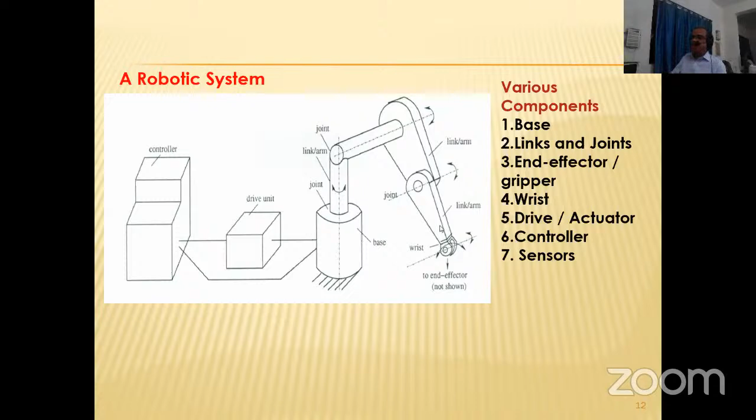Now, a typical robotic system consists of a few links, as I told, and a few joints. At each of the joints, there will be motors. The motor will be connected to the controller, and there must be sensors to collect information of the environment. There could be different types of sensors: a few internal sensors, a few external sensors. We take the help of a camera. With the help of the camera, we collect information of the environment and we do processing.

Now I'm going to discuss the areas where the principle of AI could be used in robotics. And remember, all the AI tools may not be applicable in robotics. As I mentioned, there are 4 modules of robotics. Out of these 4, the first two modules, that is kinematics and dynamics, there is no scope for using the principle of AI. So AI is to be used on the control scheme, on the communication scheme. It has to be used to incorporate intelligence into the head of a robot.

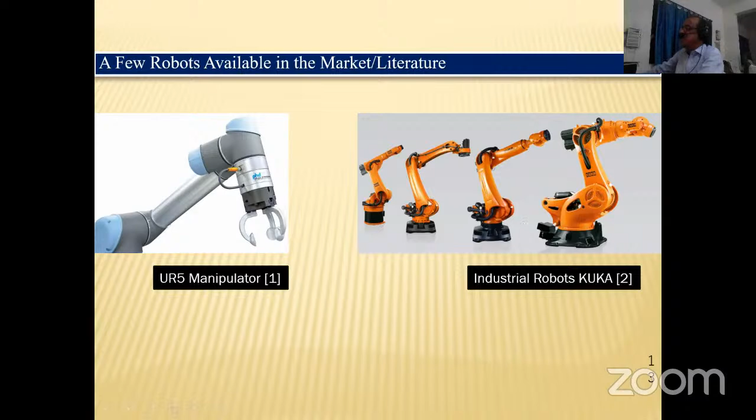Now here I'm going to show you a few robots available in the market. This is how to model the hand of a human being in a mechanical way. This is a serial manipulator called the UR5 manipulator. This is another industrial robot, the KUKA robot. This is also a serial manipulator. This is a wheeled robot, a two-wheeled, one-caster mobile robot, manufactured by Micro Robot in Singapore.

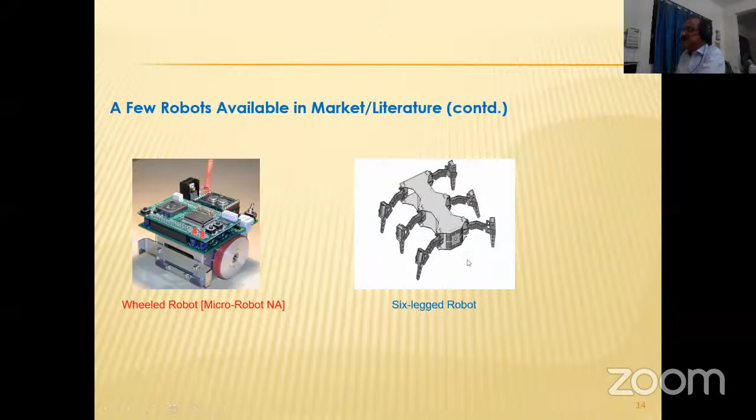This is the schematic view of a 6-legged robot, look-wise similar to a spider. Here I can show you some wheeled robots. We have also developed a wheeled robot for railway track inspection, and we have filed patents also. This is the line following robot. This is a tracked vehicle. We have modified a similar type of robot further, and designed and developed the tracked vehicle as an agricultural robot, for which we also filed a patent in 2023, this year only.

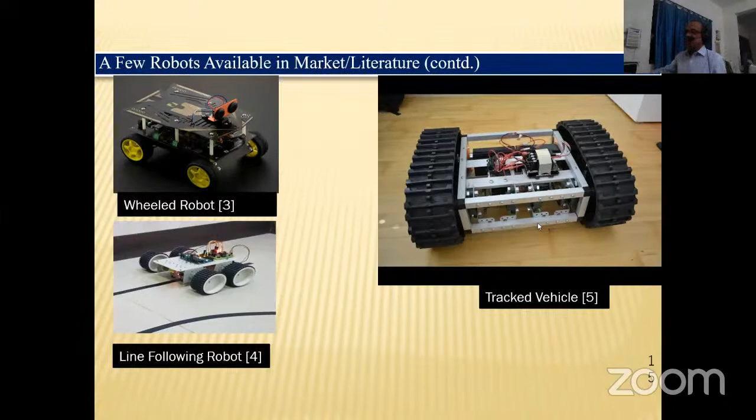Now this shows the 8-legged robot just like an insect, the 6-legged robot like an insect, the 4-legged robot like an animal, and we have also got the 1-legged hopping machine also. And this is only dynamically balanced. We have also got the humanoid robot; now we have got in our Center for Robotics, IIT Kharagpur, a robot having 25 degrees of freedom.

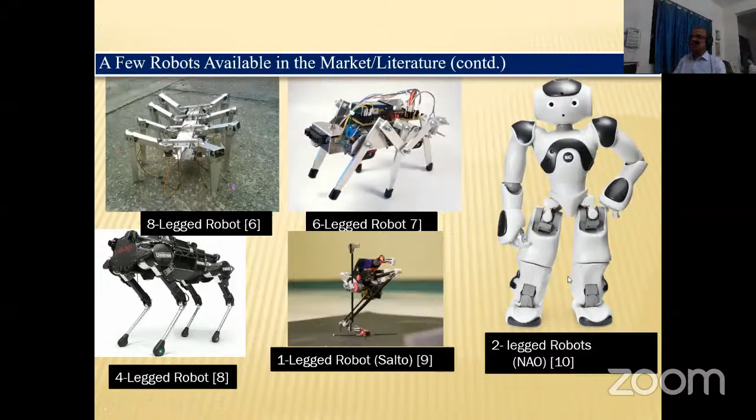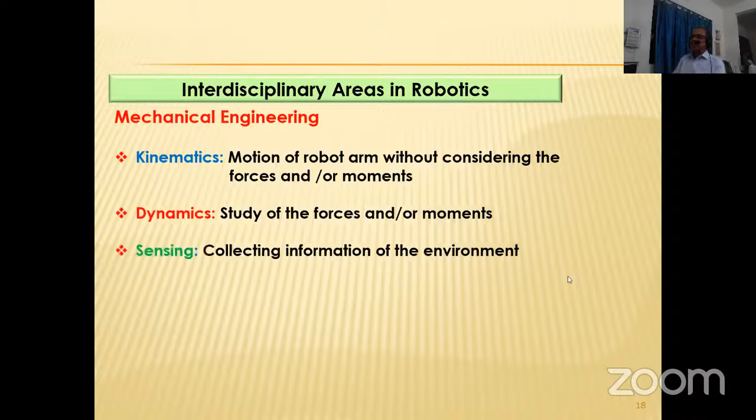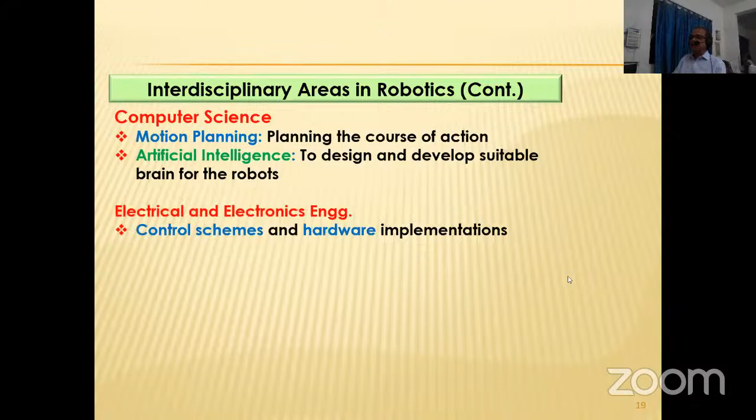So these are actually the different types of robots available in the market, and these are the references for different types of robots which I discussed. Now a few things which I'm going to discuss here: the fields where we could use the principle of AI. These are the things which I've already mentioned: kinematics, dynamics, sensing, then control, then the areas of motion planning, artificial intelligence, which are coming under the purview of computer science, electrical and electronics like control scheme, hardware implementation for the robots. Now I'm just going to concentrate more on the role of AI in robotics.

Now, as I told, in the modules of kinematics and dynamics, we cannot use the principle of AI. AI is to be used to collect information of the environment using the camera and image analysis. So in digital image analysis, there is enough scope of using AI, and nowadays people very frequently carry out this image analysis using deep learning networks, neural networks. We can also use the concept of AI to carry out multi-sensor data fusion to collect information of the environment.

Today, the second speaker, Mr. Bitan Pratihar, is going to talk after some time on how to use the principle of AI, the fuzzy logic, fuzzy clustering, fuzzy reasoning, to extract the important information regarding that particular environment. So this multi-sensor data fusion will be discussed by Bitan after a few minutes.

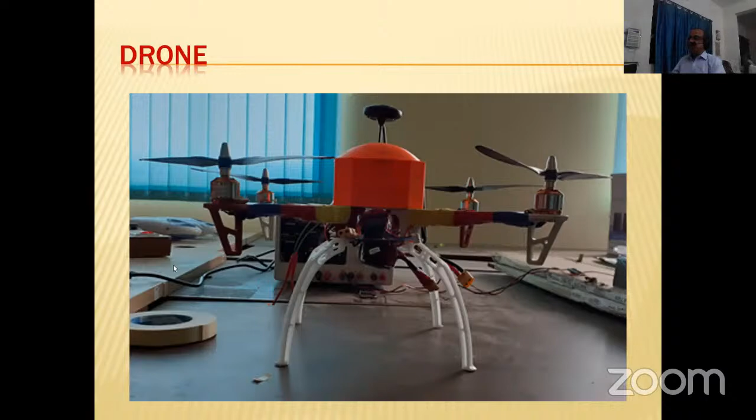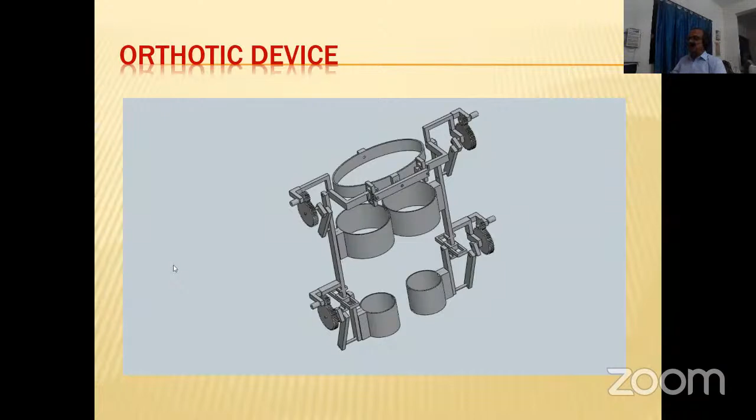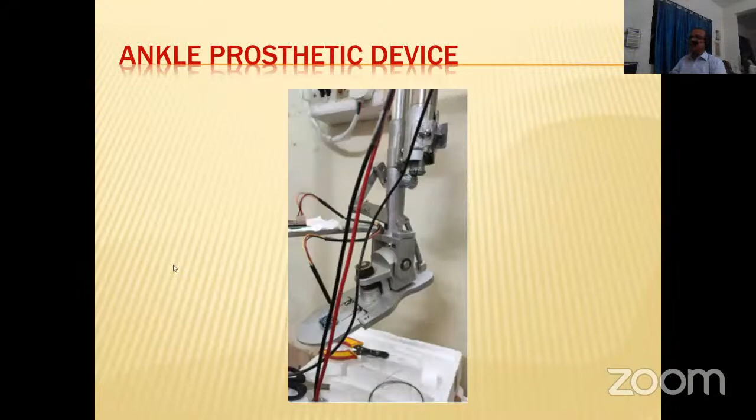I'm just going to give a summary of whatever I discussed today. Now, if I can remember, I hope I'm able to give replies to a few queries. So those queries, I'm just going to tell you one after another. For example, I tried to find out what we mean by intelligence. How can you call a person intelligent? Then we tried to find out what artificial intelligence is and how it differs from human intelligence. Can AI beat human intelligence or vice versa?

Then we introduced the concept of computational intelligence, the principle of soft computing to develop the modern AI tools, which are known as the machine learning tools. Then we discussed in brief the principle of the deep learning network, that is actually a subset of the machine learning tools, and we also discussed a little bit on generative AI. We discussed the different types of AI. We tried to find out the different applications of AI, then the merits and demerits of AI. What are the different types of AI tools?